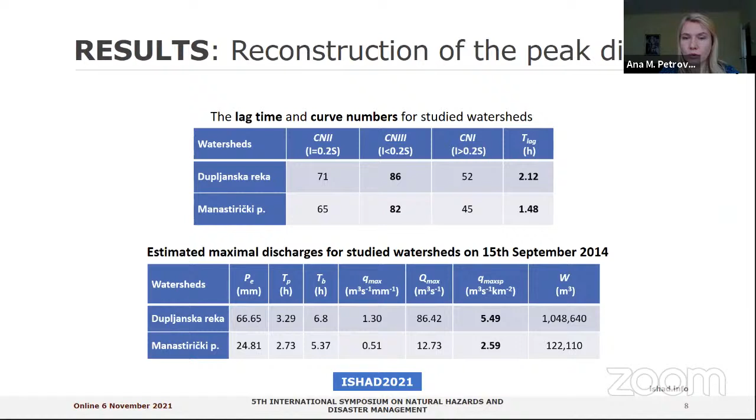And finally, we have estimating maximal discharges for studied watersheds on the subject date. Specific maximal discharge for Dupljanska reka is 5.5 cubic meters per second per square kilometer, and for Manastirički potok it is 2.6 cubic meters per second per square kilometer, which is double lower than for Dupljanska reka. Specific maximal discharge is a function of the calculated reconstructed maximal discharge and watershed area, and it is a valuable indicator if you want to compare discharges of two or more watersheds.

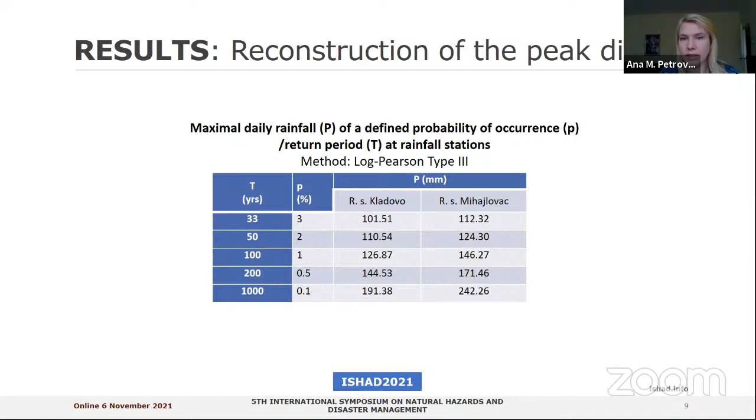So this is a table of values of maximal daily rainfall of a defined probability of occurrence and return period at rainfall stations Kladovo and Mihajlovac, using the Log-Pearson type 3 statistical method. The 100-year return period rainfall for Kladovo is 127 millimeters, and for Mihajlovac it is 146 millimeters.

The dimensional curvilinear hydrographs of computed discharges of a defined probability of occurrence for different antecedent soil moisture conditions are calculated and presented in these hydrographs. On the third hydrograph, there is a reconstructed hydrograph for the 15th September 2014 torrential flood event, which is 86.4 cubic meters per second, and the 100-year return period torrential flood has a maximum discharge of 63 cubic meters per second for the Dupljanska reka.

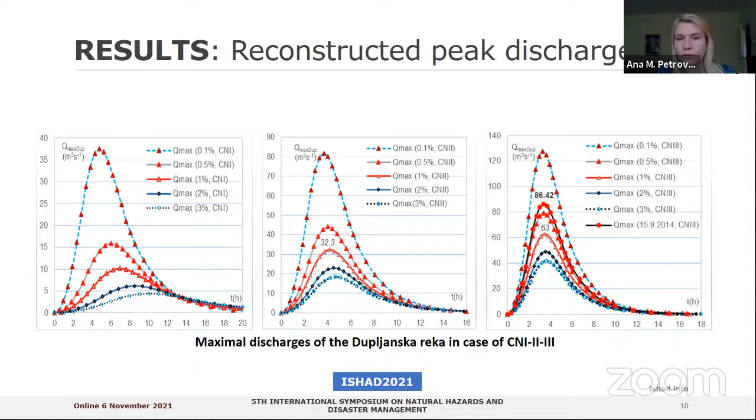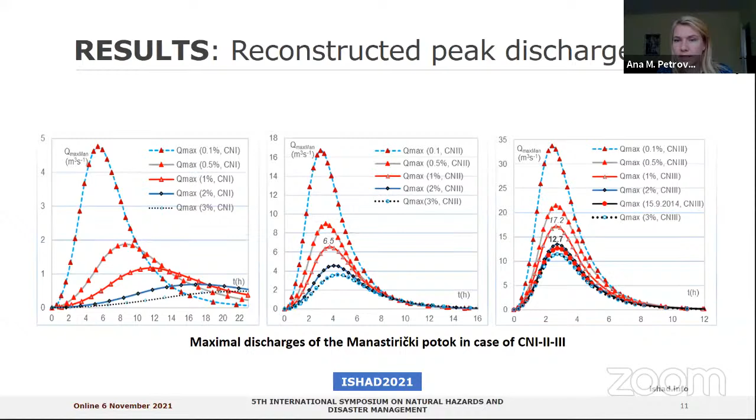Similar hydrographs we have for Manastirički potok in the case of CN1, CN2, CN3. Because of the antecedent soil moisture conditions, we also used CN3 for reconstruction of peak discharge for Manastirički potok. So the peak discharge on the subject date is calculated at 12.7, and the 100-year return period torrential flood would have a maximal discharge of 17.2 cubic meters per second.

And some comments regarding sediment transport. In the case of similar climate and rainfall characteristics, the greatest impact in the calculations of mean annual sediment transport according to the Poljakov-Kostadinov method comes from the share of agricultural area and areas with poor vegetation. The specific mean annual sediment transport is a valuable indicator if you want to compare results between watersheds. As presented in the table, the Dupljanska watershed has much higher sediment transport, a consequence of land use patterns, than the Manastirički watershed. Presented results indicate an urgent need for torrent and erosion control works, primarily in the Dupljanska watershed.

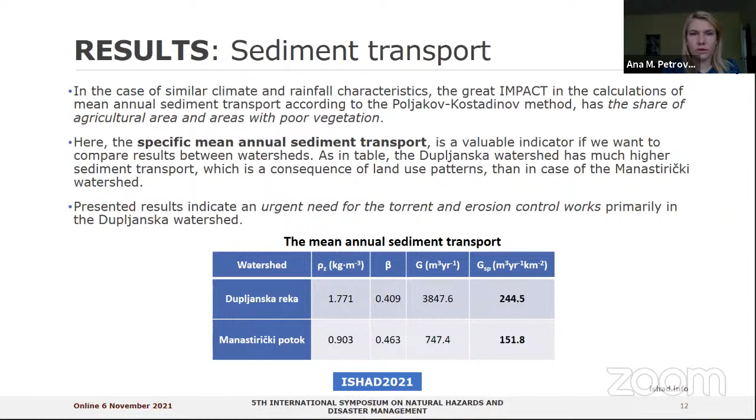A short discussion about the extremeness of the torrential flood event. The probability of occurrence of the reconstructed maximal discharge and return period of the 15th September 2014 torrential flood in Eastern Serbia is specified and equals around 250 years for the Dupljanska reka and 40 to 45 years for the Manastirički potok.

Rainfall dataset for station Kladovo for a period of 48 years contains two similar maxima: 107.2 millimeters recorded on the subject date, and the second one is 107.3 millimeters, then 93, 91 millimeters, etc., which implies that a 100-year return period rainfall will probably be higher than 107 millimeters.

On the other side, rainfall dataset for station Mihajlovac for a period of 57 years contains an absolute maximum of 180 millimeters recorded on the subject date. The data series continues with 112 millimeters, then 105, 95 millimeters, etc., which implies that the difference between the primary and secondary maximum will allow a lower 100-year return period rainfall than 180 millimeters. This also entails the greater calculated rainfall of 1%, 0.5%, or 0.1% probability of occurrence for Mihajlovac than for Kladovo.

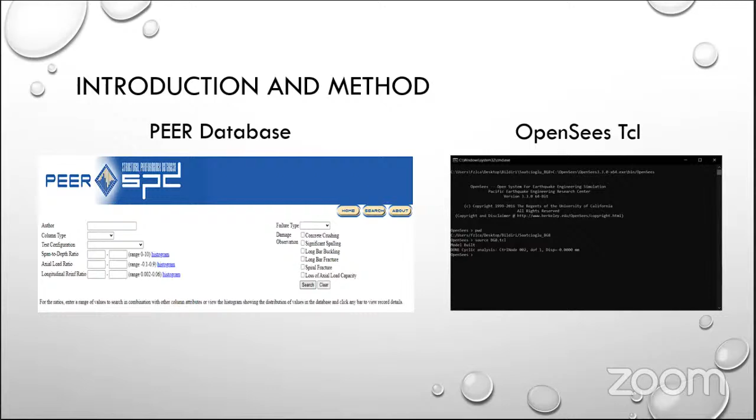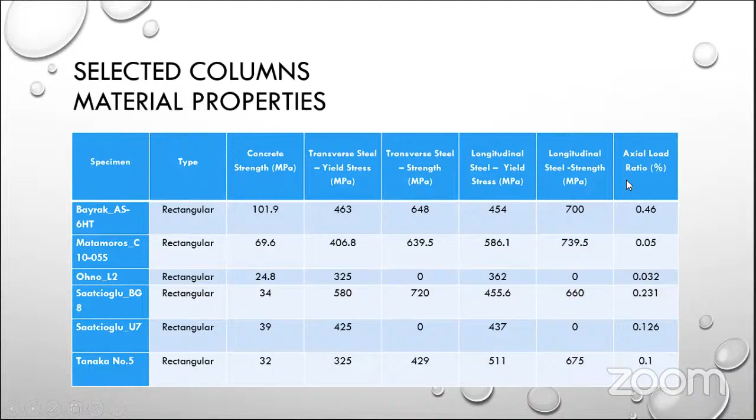In the modeling on OpenSees, the given material properties from the experimental results for each column are used in the numerical models. The concrete elements are modeled using Concrete04 for confined concrete and Concrete01 for unconfined concrete representing the concrete cover. Reinforcing steel is utilized from the software library for the longitudinal reinforcing bar.

For force-based elements, the number of integration points is selected using an approach in which the plastic hinge length over the height of the column provides a good approximation. For the displacement-based elements, the same perspective is applied to the height of the first element, employing 2 elements for all cases with 2 integration points in each case.

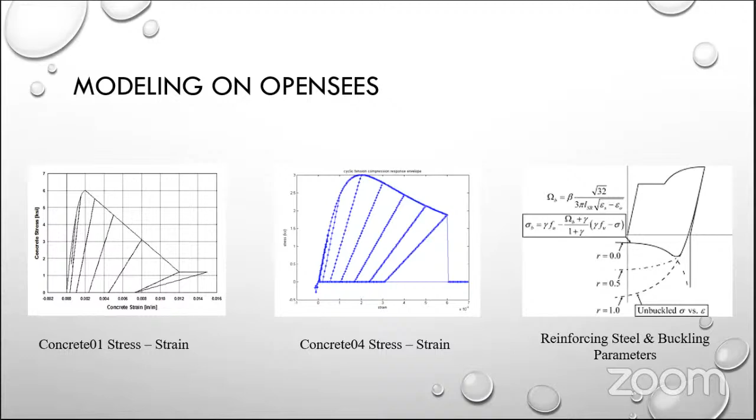As a result, the results obtained for each selected column using different fiber element types show that, in general, both element types provide good agreement with the experimental results. The displacement-based element provides a stiffer response, and convergence problems can be observed, especially among the models with high axial load.

If we look at the graphs here one by one, the Bayrak column shows great agreement in both element types, while the force-based element shows a greater match, especially along the softening range. On the other hand, for the Matamoros column, the force-based element is able to simulate the maximum and elastic zone better. Meanwhile, the model with the displacement-based element shows some dispersion through the softening zone. The pinching behavior is captured better in the model with the force-based element.

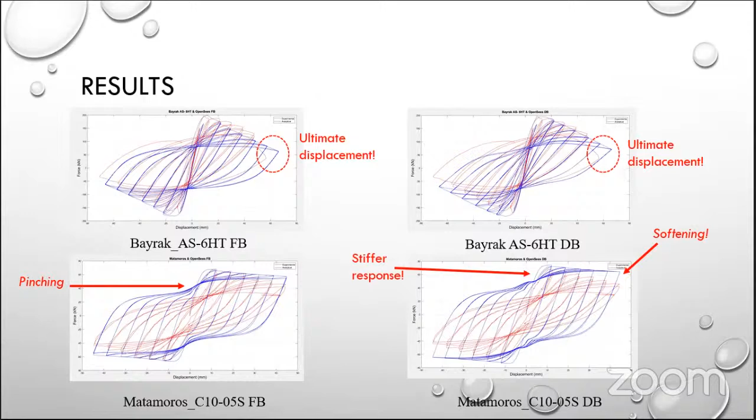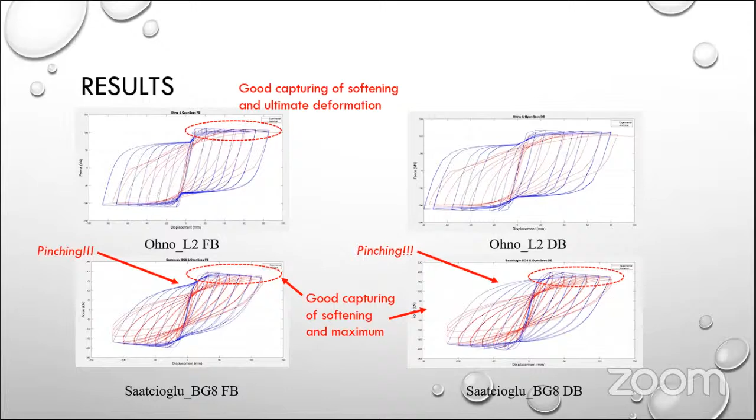The column model with the force-based element displays very good agreement on the softening range and is able to capture the ultimate displacement. Both models, Saatcioglu column, are not able to capture the pinching, but overall they do have good agreement with the 2 models.

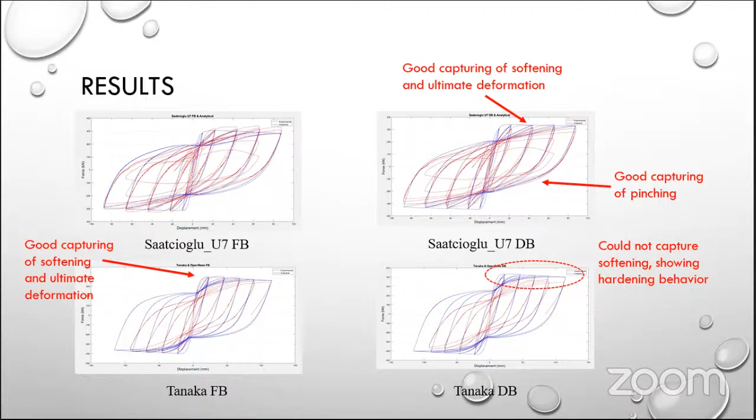And the models for the Saatcioglu column capture pinching very well. However, the model with the force-based element shows lower and the model with the displacement-based element higher global response than the experimental results. For the Tanaka column, the model with the force-based element illustrates a better agreement regarding maximum response, softening zone, and pinching.

And the results are compared in detail in the slides. You can see experiment tests over there and results using force-based elements. It's very close to force-based element and experimental elements, but the displacement-based element gives a little bit different results. We get that.

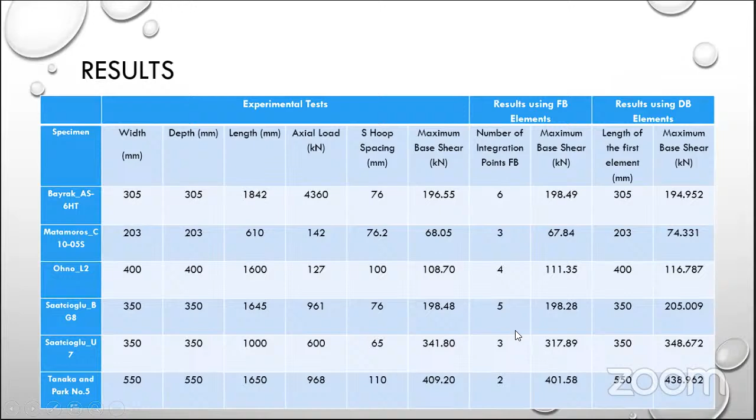So thank you for your attention. I can answer, is there any questions? Thank you so much, Fazel.

And then, do you have any questions regarding his work? I may ask you, but I'm your advisor, so let's make it simple then. Okay.

So normally, in order to capture the global response of any numerical model, you have to have optimization regarding the integration points and also the number of elements. But it seems that physical regularization is actually a smart way, and rather than working on optimization of the number of elements and the IP numbers, using one step, you're able to capture the global response of columns very well. So if you show the table, can you say that physical regularization is working perfectly?

Perfect is a key vocabulary here. Just a tip - no, no, the answer is no. Oh right, but it's an efficient way to do that.

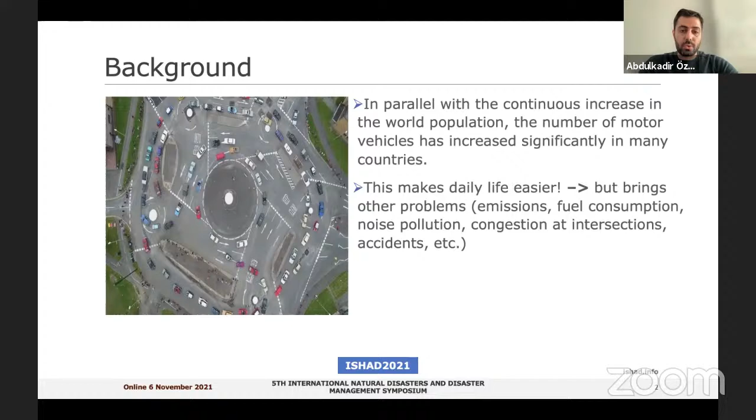When we look at the accident statistics, according to the World Health Organization, every year 1.3 million people die due to traffic accidents, and nearly 50 million are injured. In most countries, road traffic crashes cost nearly 3% of that country's GDP globally.

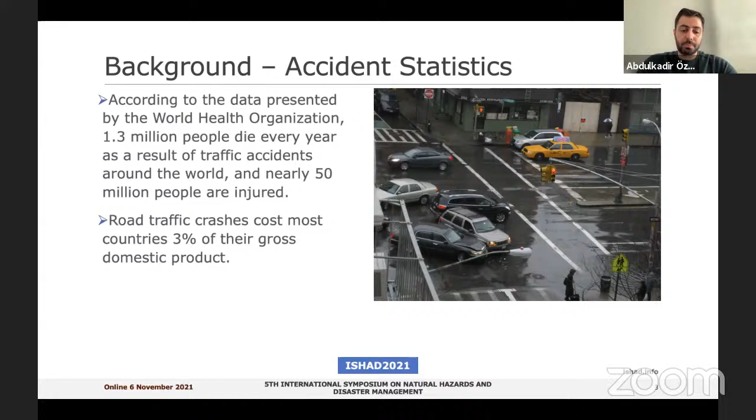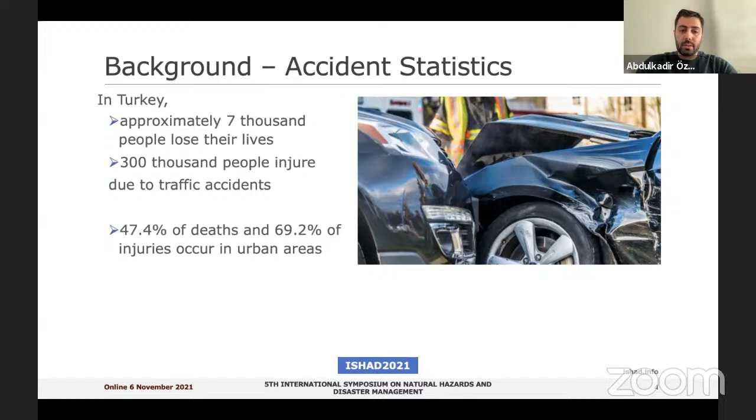In Turkey, we lost about 7,000 lives in traffic accidents, coupled with 300,000 injuries. Nearly half of the deaths and nearly 70% of the injuries occur in urban areas, which makes it much more significant for us to focus on traffic safety at intersections.

Among the faults in traffic accidents, driver faults consist the vast majority of the faults in accidents.

Violating speed limits accounts for nearly 40% of all driver faults. But violating speed limits doesn't mean driving with excessive speed - it's just not driving as appropriate as it's supposed to be based on the design. Yielding or not providing the right of way at intersections consists of 13% of the driver faults, and inappropriate lane changing accounts for 7% of traffic accidents.

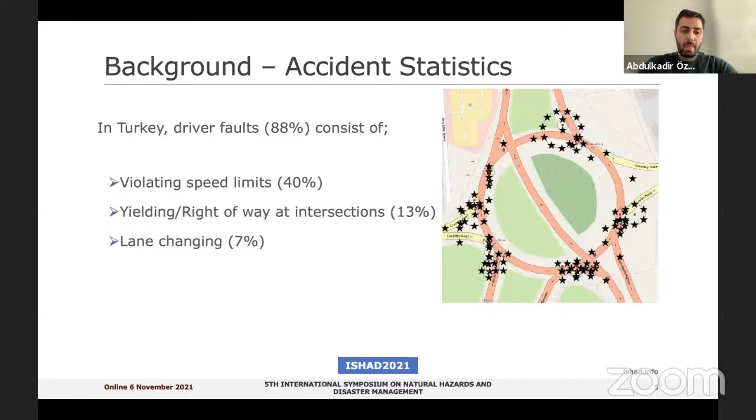So what should we do? Well, there is no magic solution, but still a lot to do.

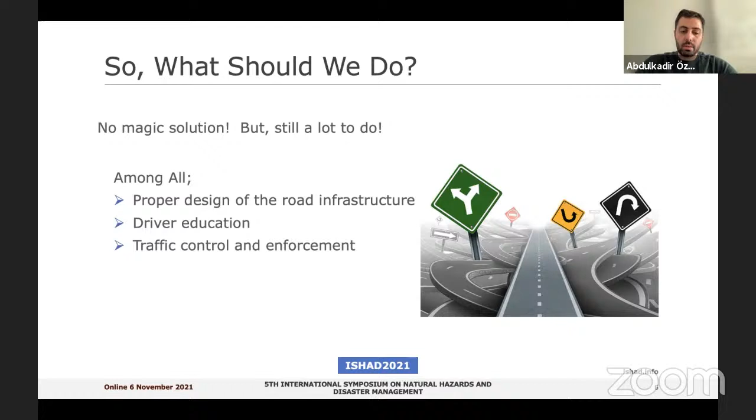First, we have to make proper design of the road infrastructure, and we have to apply in accordance with proper designs. The second most important part is driver education. We all know the rules, but we don't follow them. And the last part is traffic control and enforcement. We have to make proper traffic control management systems, specifically in urban areas, and enforce that violations should be treated rightfully.

What we have done so far, specifically in Turkey, in the last 2-3 decades, we increased the infrastructure capacity and the effectiveness of the current infrastructure. We increased the number and length of divided highways. In difficult terrains, we built bridges and tunnels to make roads much safer from a traffic safety perspective. From the technology perspective, we incorporated intelligent transportation systems and increased our traffic management capacity. We have been collecting data from all over our streets, specifically in urban areas. And from the design perspective, we have much safer cars, with more braking capacity and automation in vehicles.

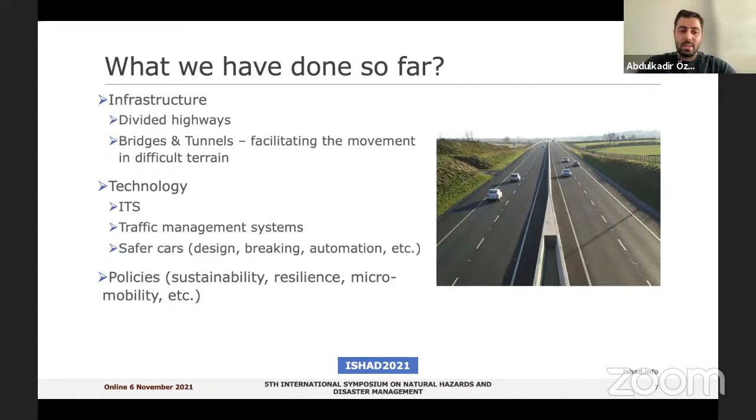We have been working on policies from the sustainability, resilience, and micromobility perspectives. But as Dr. Petrovic indicated, these are much more political, and we need more time in the long run to apply all these changes as a public. In Turkey, we have state development plans every 5 years, and the last 3 clearly state traffic safety in Turkey. The last plan, written in 2018 covering 2019 to 2023, clearly states that the causes of traffic accidents should be identified to reduce accidents and their adverse effects on daily life.

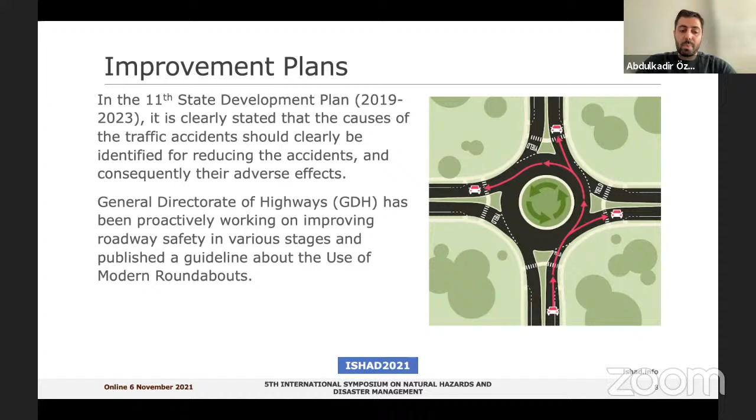About this, the General Directorate of Highways has been proactively working on improving roadway safety in various stages. From the roundabout perspective, they have published a guideline about the use of modern roundabouts.

So what is a roundabout? A modern roundabout is a circular intersection where drivers travel counterclockwise around the center island. There are no traffic signals or stop signs in a modern roundabout, but there are yield signs. Drivers approaching the roundabout should yield at entry to traffic in the roundabout, then enter the intersection and exit at their desired street or approach.

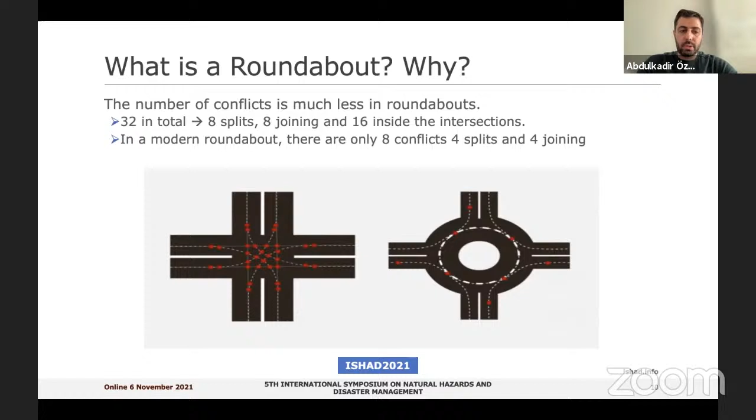So why have we been promoting the roundabout? The number of conflict points is much less in roundabouts. In a specific four-leg intersection, we have about 32 conflict points where vehicles can conflict. In modern roundabouts, this number has been reduced from 32 to 8 - 4 in the splits and 4 in the joinings. This is one of the critical advantages of using modern roundabouts, specifically in urban areas.

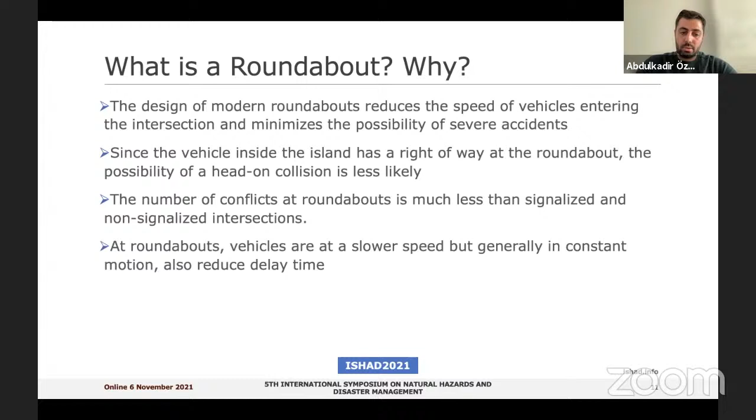Why? Because while designing modern roundabouts, they reduce the speed of vehicles entering the intersection and minimize the possibility of severe accidents, specifically reducing the possibility of head-on collisions. The number of conflict points at roundabouts is much less than at signalized and non-signalized intersections. Lastly, vehicles enter the roundabout at a slower speed but generally in constant motion, which reduces delay time from a traffic flow perspective.

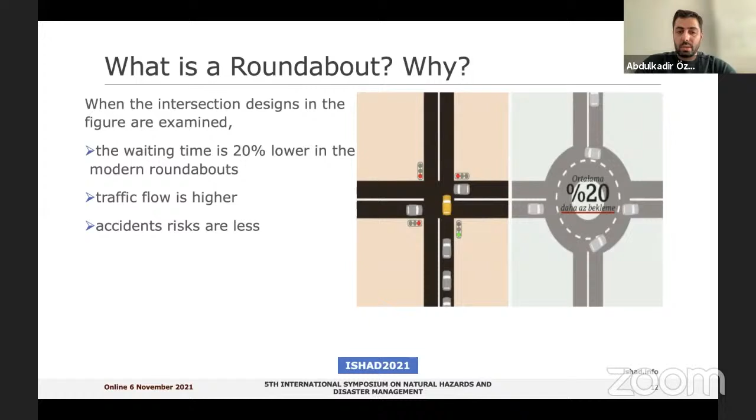In general, the waiting time is 20% lower in modern roundabouts compared to signalized intersections.

So from a disaster perspective, as we all know, transportation infrastructure plays a critical role in all stages, from preparedness to response, specifically in the first response and recovery stages. Just from the perspective of roundabouts, as we said, they have fewer conflict points, and there's a natural flow where vehicles move synchronously. These types of intersections do not rely on power supply for traffic lights, which is critical during an emergency time, power outages.

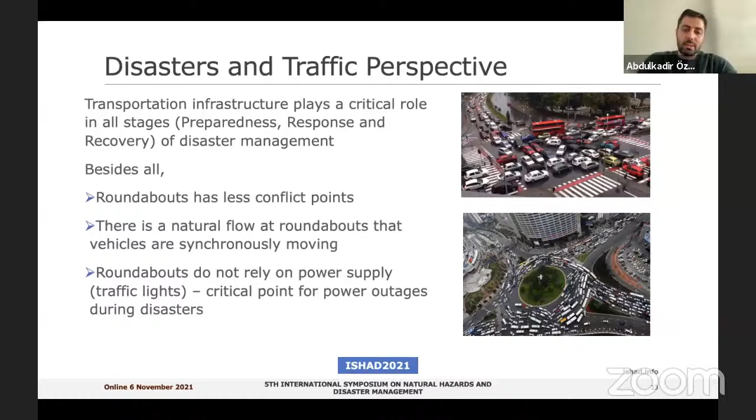We do not rely on traffic lights, so vehicles can flow simultaneously at the same time. Of course, we can see gridlock in roundabouts too, but it's going to be much worse on regular four-leg intersections compared to roundabouts.

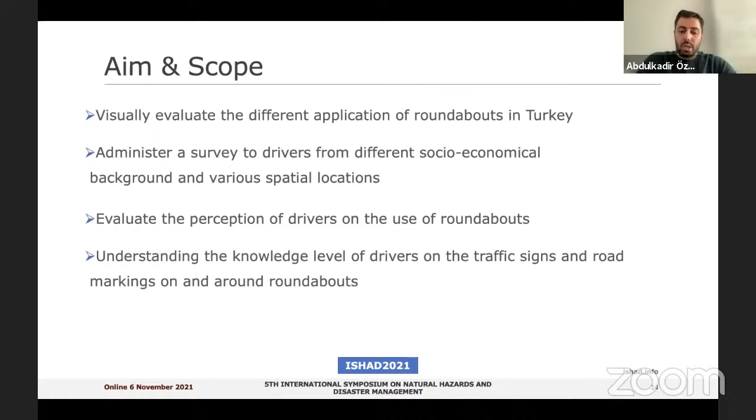So what is the aim and scope of the study we carried out in this perspective? First, we want to visually evaluate the different applications of roundabouts in Turkey. We administered a survey to drivers from different socioeconomic backgrounds and various spatial locations. We then evaluated the perception of drivers on the use of roundabouts and tried to understand their knowledge level on traffic signs and road markings.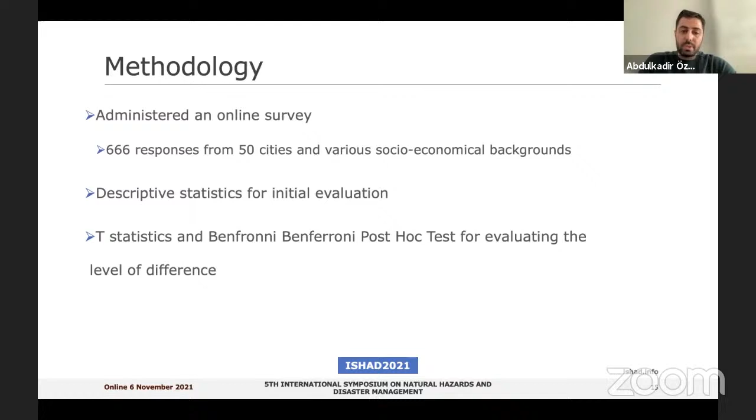We administered an online survey and received 666 responses from 50 cities. First, we looked at the descriptive statistics for initial evaluation, and then we used a post hoc test for evaluating the level of difference in the outcomes.

The vast majority of participants know what a roundabout is and have experienced driving in a roundabout in most cases. 88% of the participants encounter at least one roundabout on their normal driving routes.

We asked if they have been involved in an accident in a roundabout. Nearly 10% of the respondents said they were involved in an accident at roundabouts.

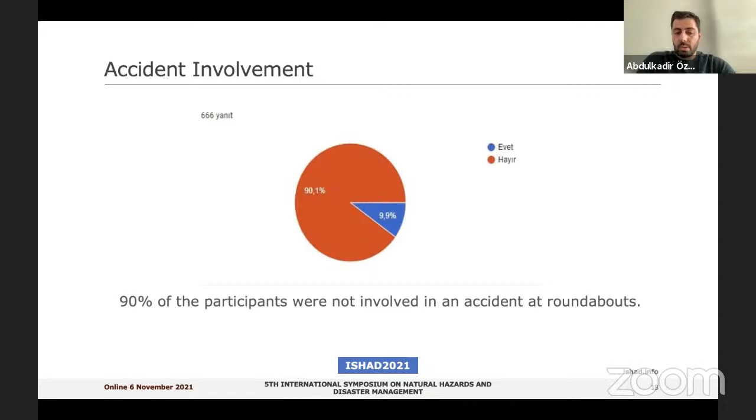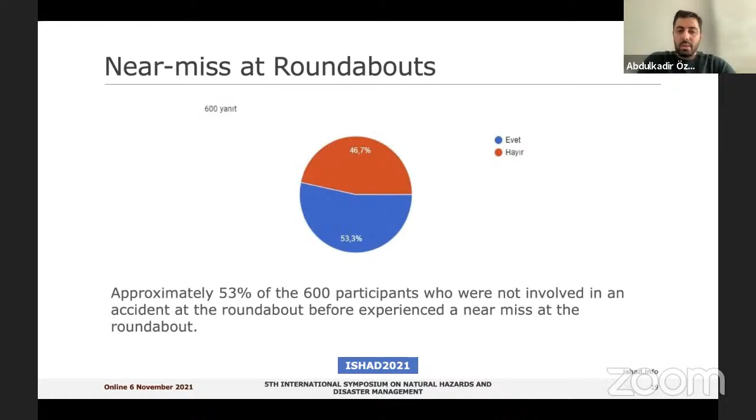Among the responses of those who did not have an accident, they provided information that they experienced a near miss in roundabouts, meaning they didn't have an accident but just missed it by sudden braking or a sharp maneuver.

We asked various questions regarding how they see roundabouts and traffic flow and traffic safety. Among these questions, the result is we know the rules, but we do not clearly obey them. We do not clearly follow the rules. This is one of the major outcomes we got from these questions.

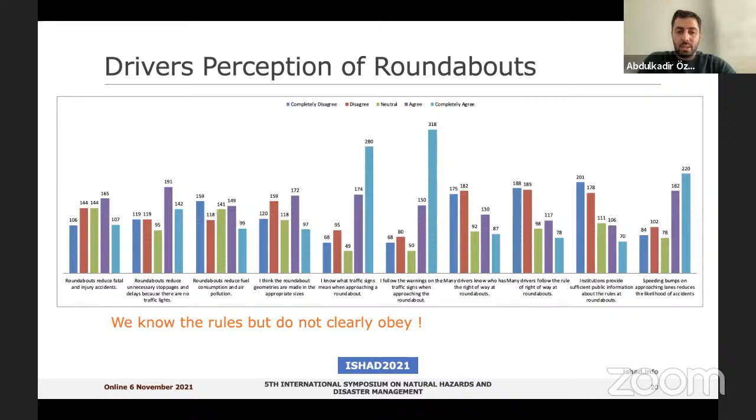We asked some questions regarding the roadway infrastructure on roundabouts, whether they are physically enough or properly applied on the roads. We realized that most questions came up with high percentages indicating that infrastructure is appropriately planned and applied.

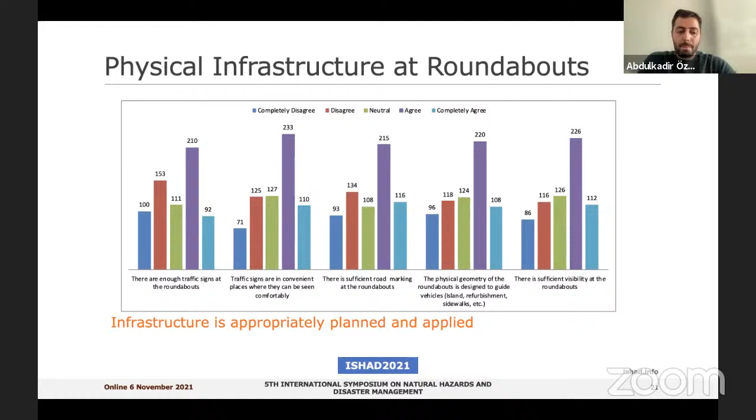We asked those who were involved in an accident or had a near miss whether this accident or coming face to face with an accident changed their perception regarding traffic rules and the use of roundabouts. Mostly, awareness increased after the accident or experiencing a near miss.

They said they follow the traffic rules much better. They are more in compliance with the speed limits. They approach intersections much more carefully compared to before the accident or near miss. And they know more about the traffic rules.

We asked questions about road markings and traffic signs regarding the use of intersections and roundabouts specifically. Most respondents provided good answers showing they know about the rules.

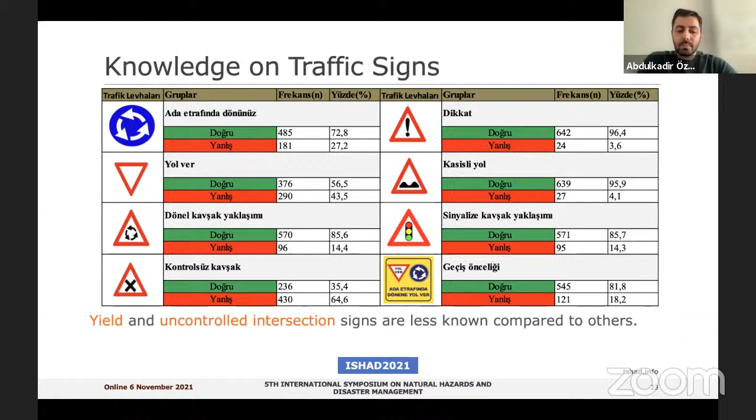Two of the traffic signs came up with a lower correct-answer rate compared to others, which are the yield sign and the uncontrolled intersection sign. But again, this shows that we know the rules, but we do not follow them.

We used t-statistics and the Bonferroni test to see the level of difference by gender, age, education, etc. We see that there's a difference between men and women among the respondents. Men have a higher number of correct answers on the traffic signs questions compared to women respondents.

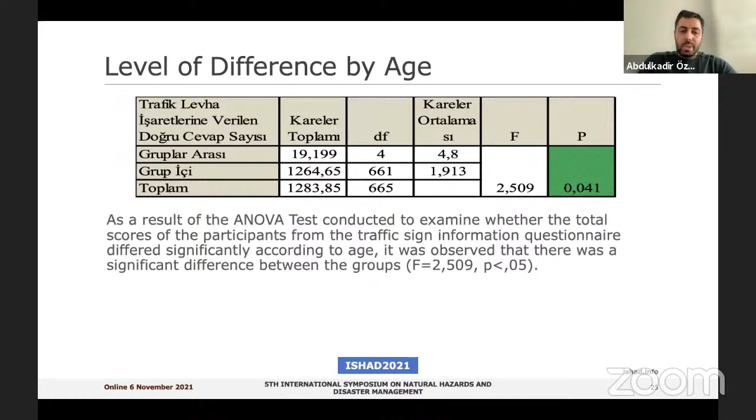We then looked at the level of difference by age. We see that the age group 25 to 34 has much more correct answers compared to the age group 18 to 24, who are much younger and most probably don't have a driver's license or just got one, and those above 65, who are probably not driving their own vehicles too much. In both cases, the younger mid-age group, 25-35, had a higher correct number than other groups.

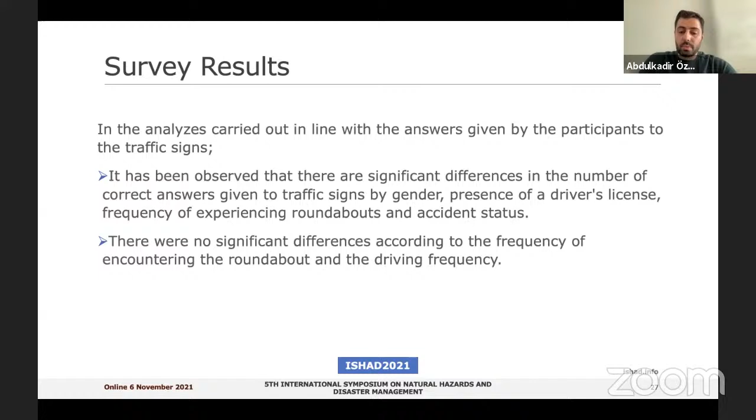So the results revealed that correct answers given to traffic signs by gender, presence of a driver's license, frequency of experiencing roundabouts, and accidents have a level of difference. There's no significant difference observed regarding the frequency of encountering the roundabout and driving frequency.

As a conclusion, approximately 10% of participants were involved in an accident. Nearly 53.3% of non-accident-related respondents experienced a near miss. Most respondents know the rules, traffic signs, and road markings well. Participants who experienced an accident or a near miss had a higher correct answer rate than other participants.

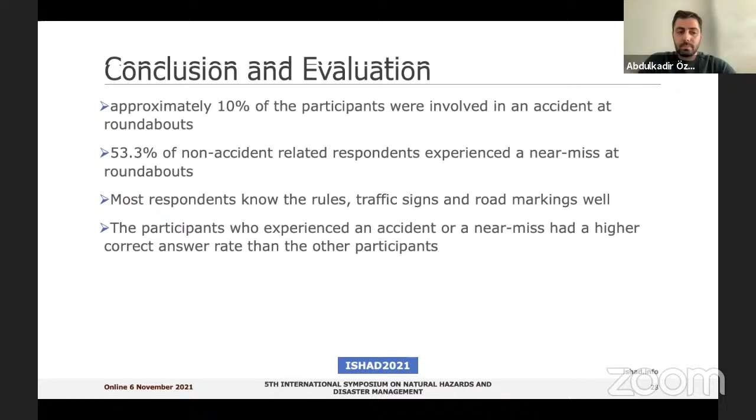It's seen that the participants' knowledge about traffic signs is not very low, but the high rates of accidents or near-accidents are thought-provoking. It's thought that this result is not at a sufficient level to yield to vehicles in the roundabout and obey the rules, although drivers know the rules.

It's thought that the existence of different applications in roundabouts throughout the country, and in road designs that include a central island although there is no roundabout, also affects this situation. From both traffic safety and traffic flow efficiency perspectives, it should be a top priority for relevant institutions to carry out necessary studies about roundabouts and to eliminate information pollution among drivers and pedestrians.

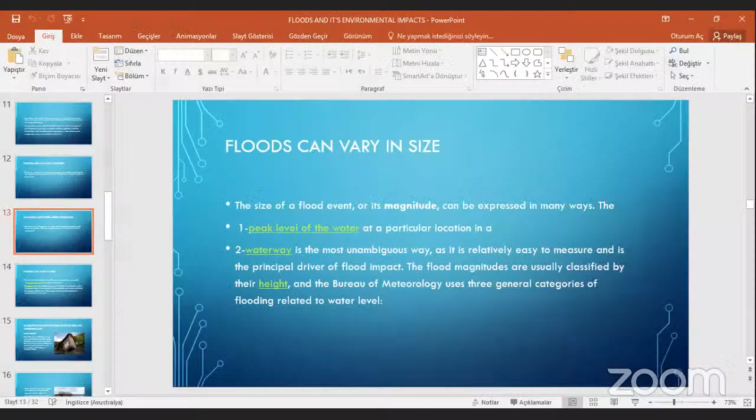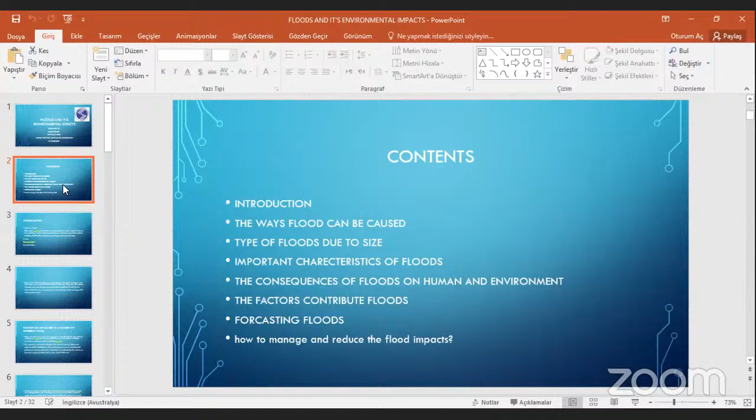Okay, let's start. I'm Anud Fawaz Al-Dardasawi, and I'm going to talk about floods and their environmental impacts. I made this paper with my respectful Hoja, Baytullah Iran. Firstly, I want to talk about the introduction to floods and the way floods can be caused, types of floods due to size, important characteristics of floods, the consequences of floods on humans and the environment, the factors contributing to floods and forecasting floods, and how to manage and reduce floods' impacts.

Firstly, we have to know what a flood is. When water inundates land that is normally dry, this is called a flood. Floods can be caused by a number of processes. Floods are a natural process, but mankind's activities affect flooding. Floods occur at irregular intervals and vary in size, area of extent, and duration.

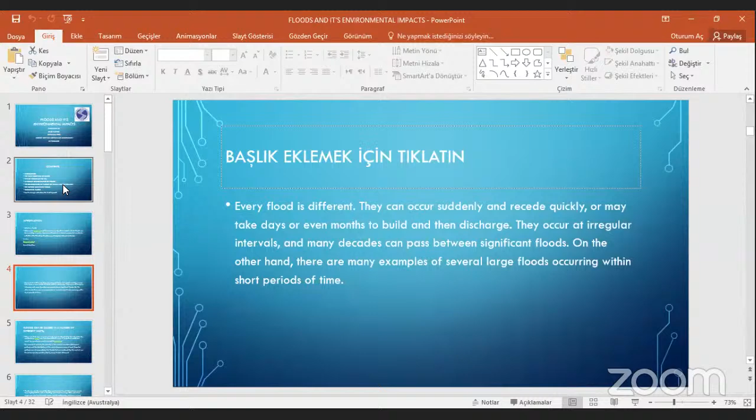Every flood is different. They can occur suddenly and recede quickly, or may take days or even months to build and then discharge. They occur at irregular intervals, and many decades can pass between significant floods. On the other hand, there are many examples of several large floods occurring within short periods of time.

Floods can be caused in a number of different ways. When rain falls over an area of land, some is absorbed by the soil, while the rest becomes runoff and flows downhill. The area of land that contributes runoff to a particular point is called the catchment. The amount of rainfall, the intensity of the rainfall over time (the temporal pattern), and the distribution of the rainfall over an area of land (the spatial pattern), can all vary widely. The floods produced by this rainfall are therefore equally variable. That is, every flood is different.

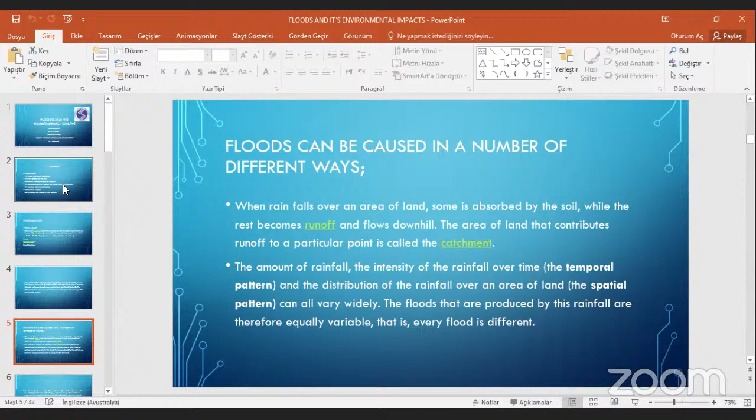Floods can also be caused by other mechanisms. Recent international events have highlighted the risk of flooding from tsunami. Large tides and storm surges can also flood coastal areas. Inland, earthquakes, volcanoes, or landslips can also cause flooding, as can breaches or releases in natural or man-made barriers to flooding, such as dams and levees.

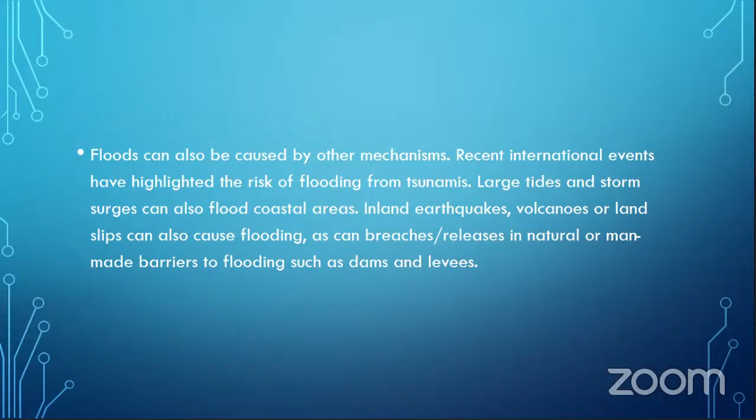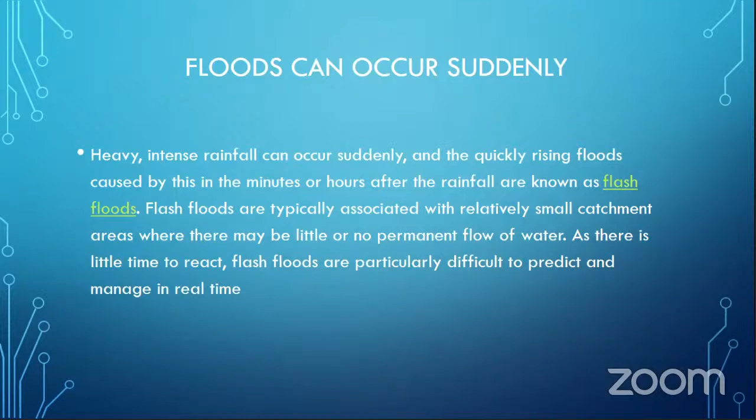Heavy intense rainfall can occur suddenly and quickly, causing floods within minutes or hours after the rainfall, known as flash floods. Flash floods are typically associated with relatively small catchment areas where there may be little or no permanent flow of water, as there is little time to react. Flash floods are particularly difficult to predict and manage in real time.

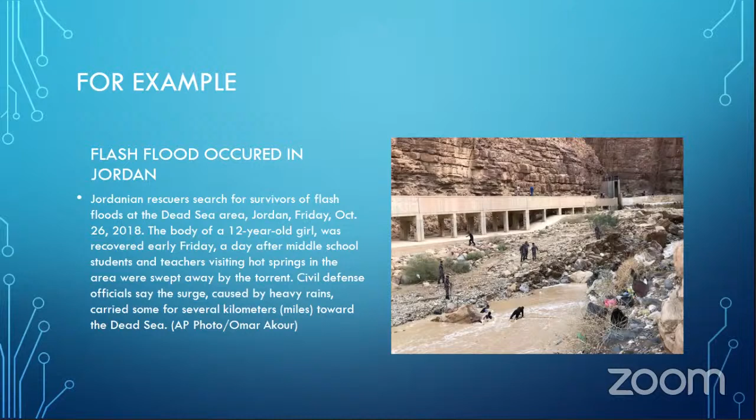This is a small example about flash floods. This happened in Jordan. Jordanian rescuers search for survivors of flash floods at the Dead Sea area, Jordan, Friday, October 26th. The body of a 12-year-old girl was recovered early Friday, a day after middle school students and teachers visiting hot springs in the area were swept away by the torrent. Civil defense officials say the surge caused by heavy rains carried some victims several kilometers towards the Dead Sea.

Floods can also occur slowly. In larger catchment areas, rainfall can build up over hours, days, or weeks. The runoff from this rainfall flows across land and then down gutters, drains, gullies, creeks, and rivers, and may create significant floods that inundate large areas of land for days, weeks, or months. With more time to react, flood warnings are more effective for these types of floods.

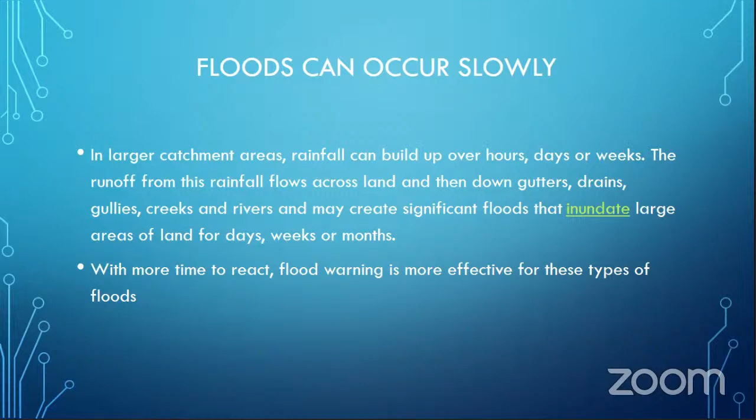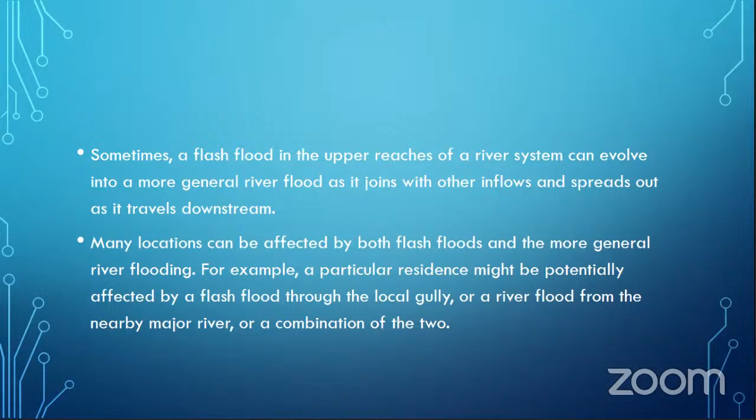Sometimes a flash flood in the upper reaches of a river system can evolve into a more general river flood as it joins with other inflows and spreads out as it travels downstream. Many locations can be affected by both flash floods and more general river flooding. For example, a particular residence might be potentially affected by a flash flood through a local gully, a river flood from a nearby major river, or a combination of the two.

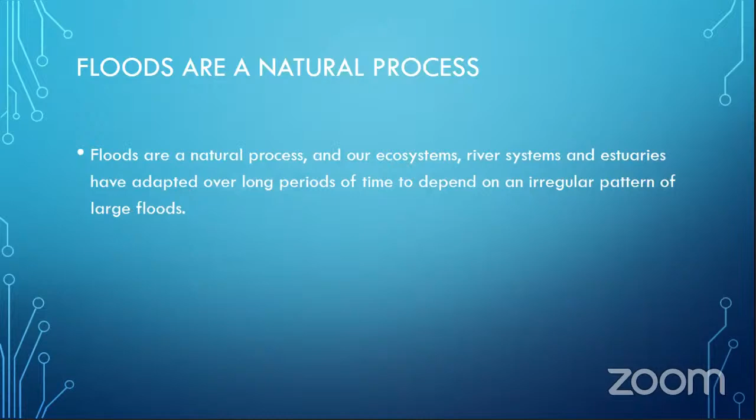Floods are a natural process in our ecosystems. River systems and estuaries have adapted over a long period of time to depend on an irregular pattern of large floods. As mankind, we make a lot of changes to our catchments, including land clearing, urban development, and dams, that can change the impact of a flood on the natural environment.

Floods can vary in size too. The size of a flood event, or its magnitude, can be expressed in many ways. The peak level of water at a particular location in a waterway is the most unambiguous way, as it's relatively easy to measure and is the principal driver of flood impact.

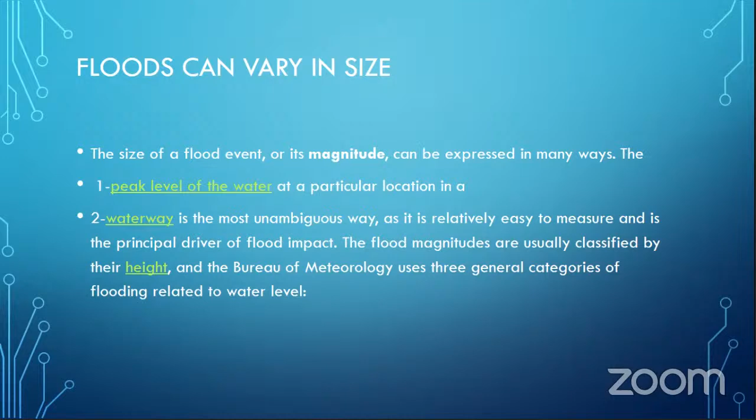Flood magnitudes are usually classified by their height, and the Bureau of Meteorology uses three general categories of flooding related to water level. The first is major floods. This causes inundation of large areas, isolating towns and cities. Major disruptions occur to road and rail links. Evacuation of many houses and business premises may be required. In rural areas, widespread flooding of farmland is likely.

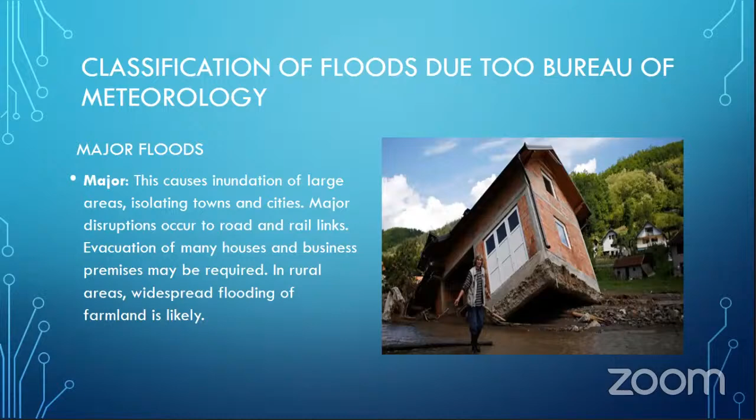The second is moderate floods. This causes the inundation of low-lying areas, requiring the removal of stock and/or the evacuation of some houses. Main traffic bridges may be closed by floodwaters.

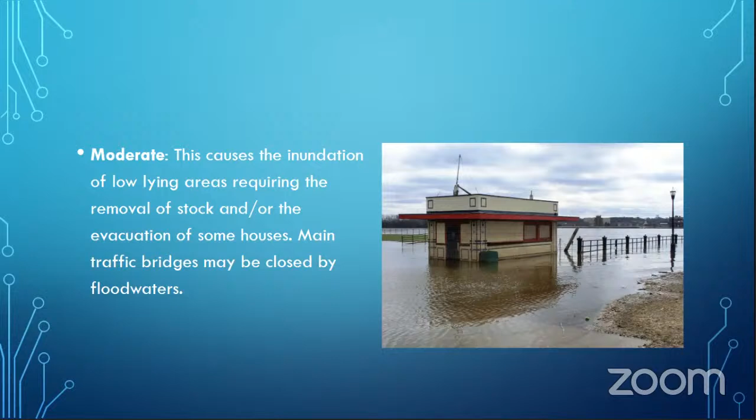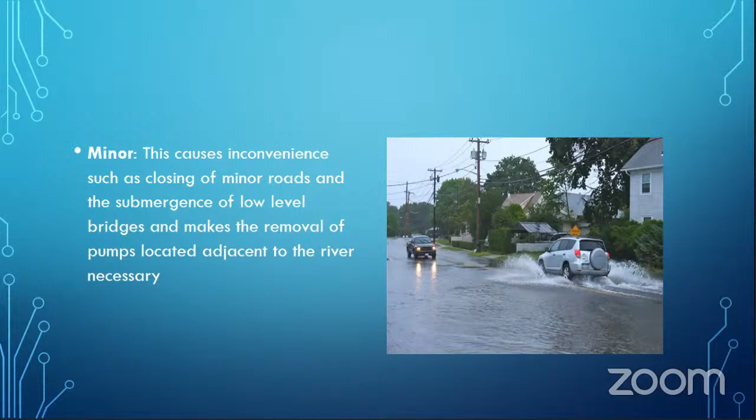The third is minor floods. This causes inconvenience such as closing of minor roads and the submergence of low-level bridges, and makes the removal of pumps located adjacent to the river necessary.

Other important characteristics of floods that contribute to their severity include the total amount of water in the flood, or the flood volume. The flood volume contributes both to the level and duration of flooding. The flood mitigation ability of dams and detention basins is less for large volume floods.

How fast the flood rises, or rate of rise - a flood that rises quickly provides less time for warning and evacuation. How fast the water is flowing, the flow velocity - faster flow causes a higher risk to human life, a higher risk of erosion, and more damage to infrastructure.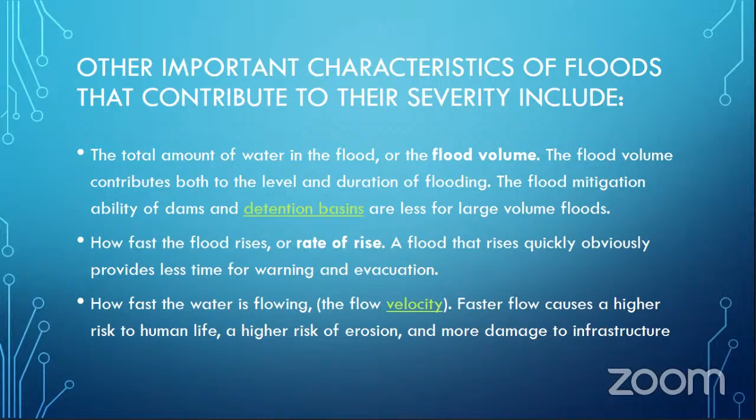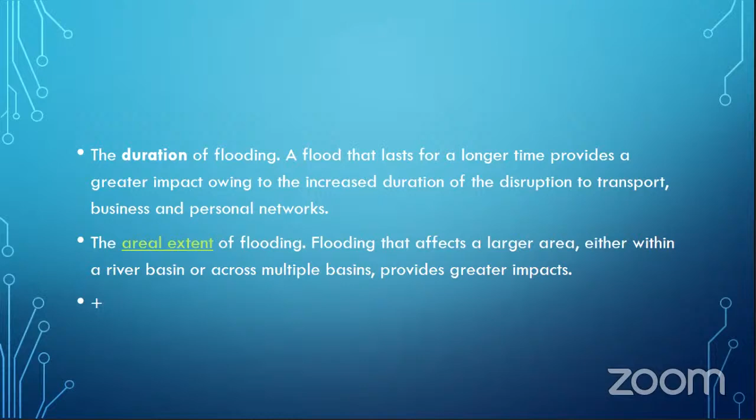The duration of flooding - a flood that lasts longer provides a greater impact owing to the increased duration of disruption of transport, business, and personal networks. The areal extent of flooding - flooding that affects a large area, either within a river basin or across multiple basins, provides greater impacts.

The consequences of floods impact on both individuals and communities, and have social, economic, and environmental consequences. The consequences of floods, both negative and positive, vary greatly depending on the location and extent of flooding, and the vulnerability and value of the natural and constructed environments they affect.

As most people are well aware, the immediate impact of flooding includes loss of human life, damage to property, destruction of crops, loss of livestock, and deterioration of health conditions owing to waterborne diseases. As communication links and infrastructure such as power plants, roads and bridges are damaged and disrupted, some economic activities may come to a standstill.

People are forced to leave their homes and normal life is disrupted. Similarly, disruption to industry can lead to loss of livelihoods. Damage to infrastructure also causes long-term impact, such as disruptions to supplies of clean water, wastewater treatment, electricity, transport, communication, education, and healthcare.

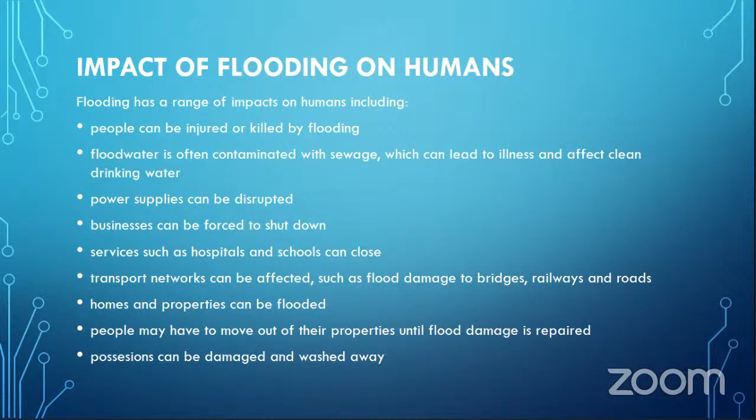So, impact of flooding on the environment: wildlife habitats can be destroyed by floodwater. Contaminated floodwater can pollute rivers and habitats. Silt and sediment can destroy crops on farms.

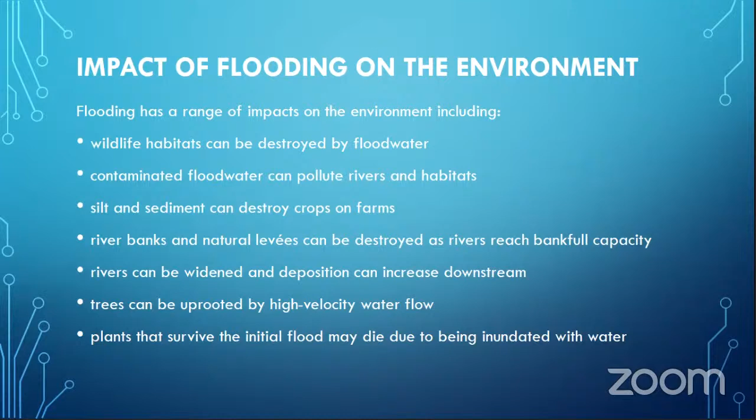Riverbanks and natural levees can be destroyed as rivers reach bankfull capacity. Rivers can be widened, and deposition can increase downstream. Trees can be uprooted by high velocity water flow. Plants that survive the initial flood may die due to being inundated with water.

Environmental benefits of flooding: the environmental benefits of flooding can also help the economy through things such as increased fish production, recharge of groundwater resources, and maintenance of recreational environments.

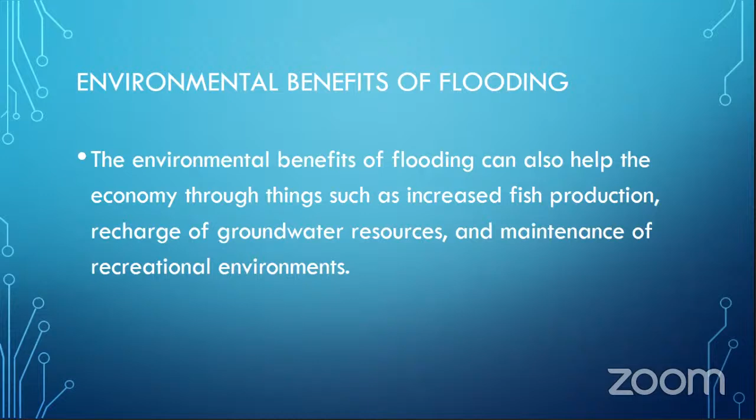Floods affecting coastal resources - many of our coastal resources, including fish and other forms of marine production, are dependent on the nutrients supplied from the land during floods. The negative effects of floodwater on coastal marine environments are mainly due to the introduction of excess sediment and nutrients, and pollutants such as chemicals, heavy metals, and debris. These can degrade aquatic habitats, lower water quality, reduce coastal production, and contaminate coastal food resources.

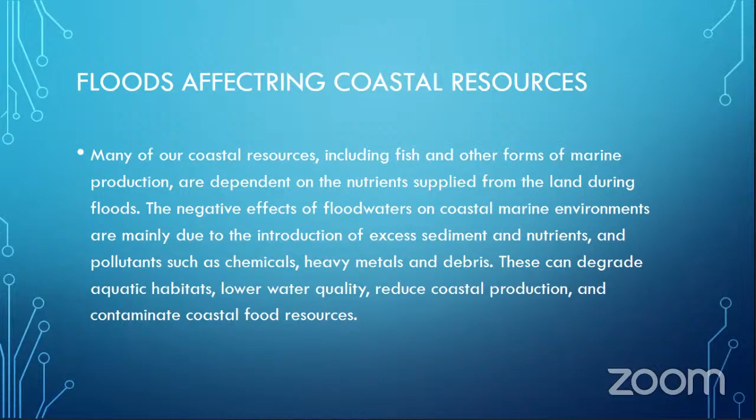Rainfall is the most important factor in creating a flood, but there are many other contributing factors. When rain falls in a catchment, the amount of rainwater that reaches the waterways depends on the characteristics of the catchment, particularly its size, shape, and land use. Some rainfall is captured by soil and vegetation, and the remainder enters waterways as flow.

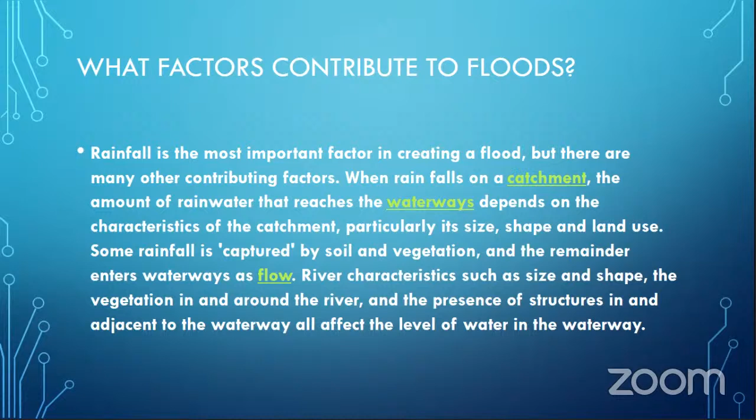River characteristics such as size and shape, the vegetation in and around the river, and the presence of structures in and adjacent to the waterway all affect the level of water in the waterway.

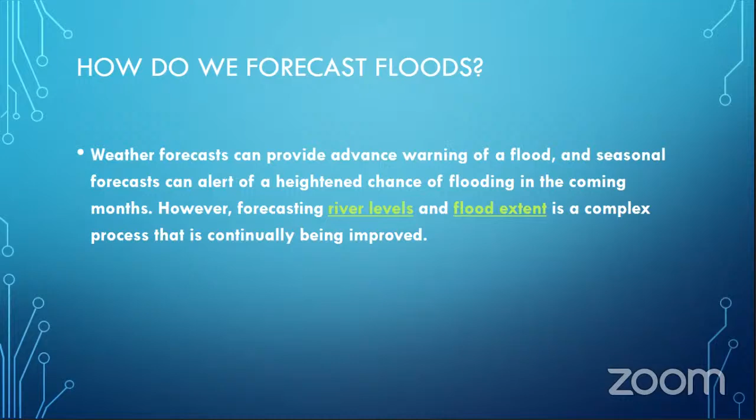So how do we forecast floods? Weather forecasts can provide advance warning of a flood, and seasonal forecasts can alert of a heightened chance of flooding in the coming months. However, forecasting river levels and flood extent is a complex process that is continually being improved.

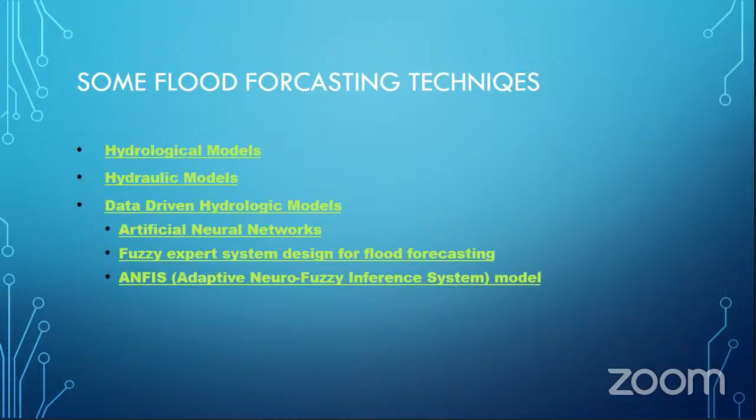Some flood forecasting techniques include hydrological models, hydraulic models, data-driven hydrologic models, artificial neural networks, fuzzy expert systems designed for flood forecasting, and adaptive neuro-fuzzy inference systems.

So how do we communicate and warn about floods? Flood warning systems turn forecasts into messages designed to reduce the negative impacts of floods. Warning systems should be accurate, timely, and reliable. Prior community awareness of flood risk can make warning more effective. Improving our warning systems could reduce social losses from floods.

So how do we estimate the chance of a flood occurring? Understanding the chance of different size floods occurring is important for managing flood risk. The chance of a flood event can be described using a variety of terms, but the preferred method is the annual exceedance probability, AEP. A flood with a 1% AEP has a 1 in 100 chance of being exceeded in any year. Currently, the 1% AEP event is designated as having an acceptable risk for planning purposes nearly everywhere. However, good planning needs to consider more than just 1% AEP floods.

Thank you for listening. And if you have any question, I can take it now.